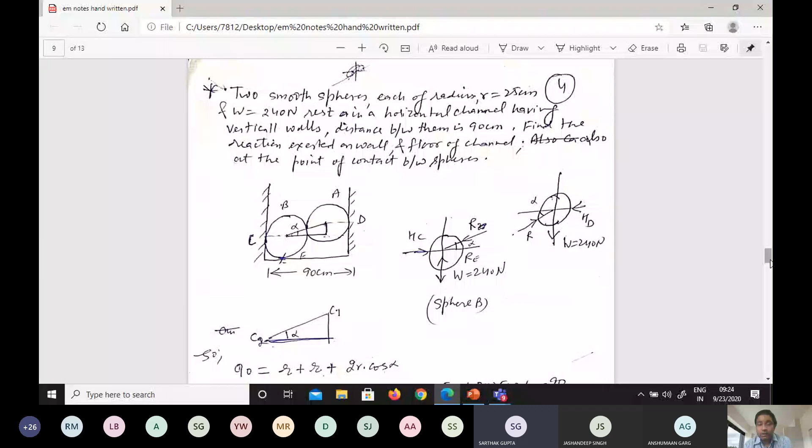My question to you all first is that I gave you one numerical problem on Friday. Were you able to solve this problem? Yes sir, we all did. Can I discuss the answers of this problem? Though I have only given you the question part, I am here explaining how you have to do it.

I assume all of you are very intelligent and good students, so I assume you all have solved the problem. But I still want to discuss it so that if one or two students are not able to get it, they can also understand. Meanwhile, I will also share the answers.

So this is the two smooth spheres here, and this is the rectangular wall here. You can see this is sphere B, which is in contact with this vertical, or rectangular trough, at point C and point E, and at point D. So we have made the FBD. You can see for sphere B, the FBD is like that, very simple.

When the vertical wall is there, this is the reaction here, RC. I think there is no issue in that.

Similarly, when you see for sphere B, it is lying on the floor, so there has to be two reactions: one weight of the sphere acting downward, and the reaction from the point E. So RE is the reaction acting upwards, and W is the weight acting downwards for sphere B.

And one reaction, what is this reaction? Because two spheres, sphere A and sphere B, are both in contact. I already told you earlier, reaction always acts when two bodies are in contact. So these two spheres are in contact, so two reactions will be there. Let us say it is R, and this angle here is alpha.

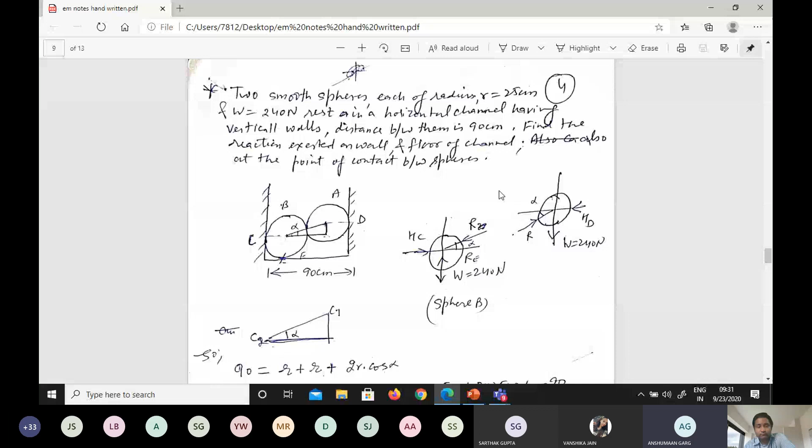Sir, can you please explain that triangle part again? Yeah, I'm again explaining it. See here.

Because we know we have to calculate the alpha here. This is the reaction R, which is between the two spheres. We have to calculate the alpha angle here. So how will we calculate it? Let us say this is point C1, this is point C2.

I have just made the diagram, the extension view or the enlarged view of this part. C1, C2, and angle is alpha. This portion is how much? It is R plus R, that is 2R.

Okay, and what is this portion? We have to calculate this portion according to our question. So this total is how much? 90. So 90 can be equal to, this is R and this is R. So R plus R is how much? 2R plus C. This is base.

We have to calculate this part only. This is R and this is R. We have mentioned here R plus R plus. What is this portion? Base upon hypotenuse. What is it? Base upon hypotenuse is cos alpha. What is hypotenuse? R plus R, that means 2R. That will be plus 2R cos alpha.

So this total 90 length can be written as R. This one is R, this one is also R, plus this distance is how much? Base upon hypotenuse. Hypotenuse is 2R cos alpha. So we have written here 90 is equal to 2R plus 2R cos alpha. And after that we have just calculated the value. We get the value of alpha here, 36.87 degrees.

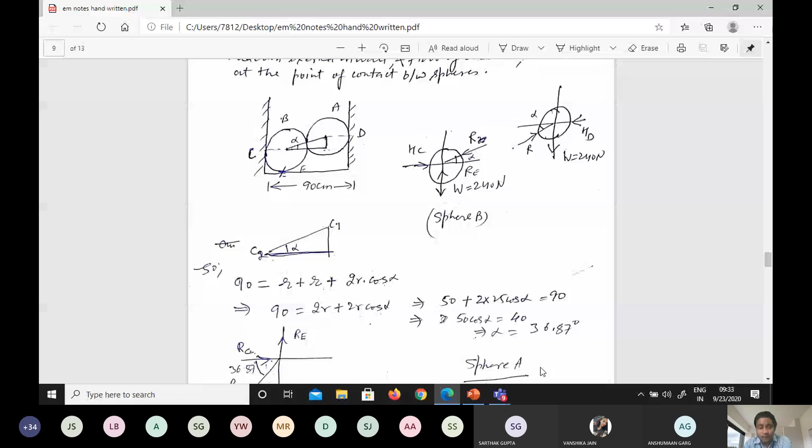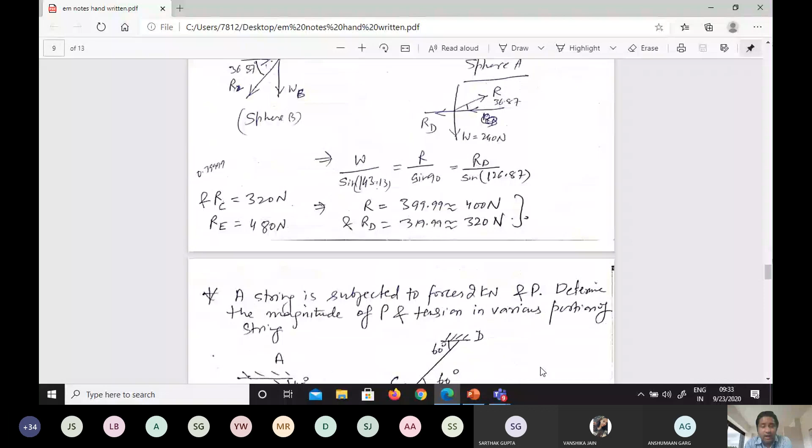So now is it clear to you? Yes sir, clear. So after calculating the alpha, we have just substituted the values, and we will get the values R, RD, RC and RE. This is the final solution for the numerical which I have given you in the previous class. So I hope that you are now able to solve the problems of sphere.

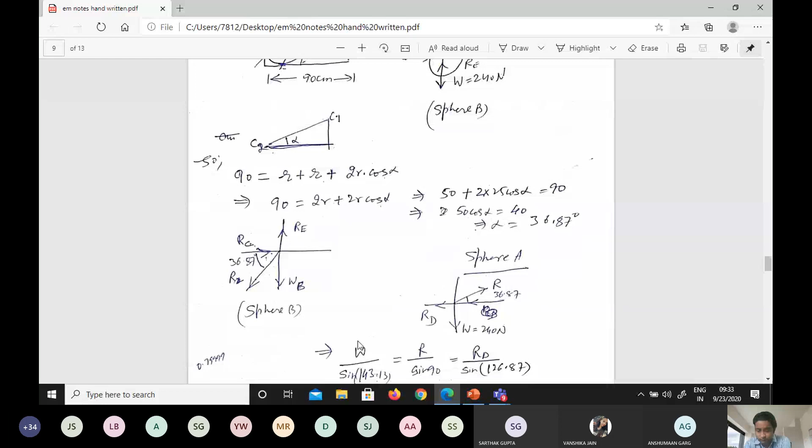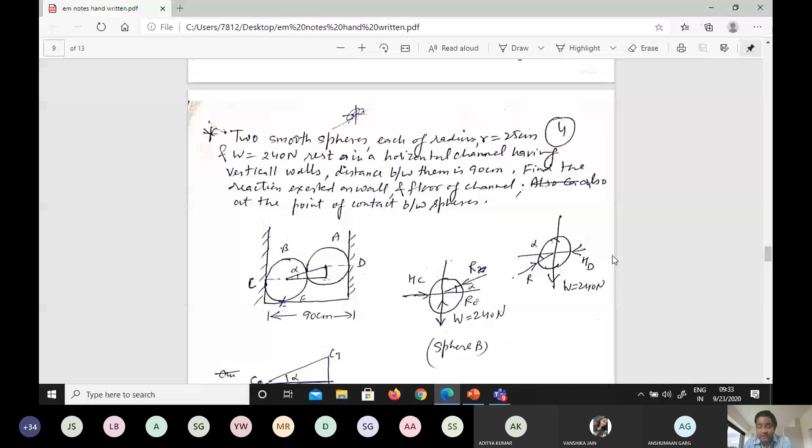Now coming to next problem. I am discussing very simple problems right now so that you can able to understand. Now coming to next problem here. Write down the problem: A string is subjected to a force of 2 kN and the force P, and determine the magnitude of the force P and the tension in the various portions of the string.

This is the wall here at point A. This is the wall here at point D, and we have hung one string from here, and we have hung another string from this at CD. At this CD string we have put one weight hanging here, and after that again we have put a string here BC, and these three strings AB, BC and CD are combined at point B, and from point B we have again hung a force of 2 kN, and the angles I mentioned to you.

So what you have to do: you have to determine the magnitude of the force P and the tension in the various portions of the string. So can you do this problem?

Yes, sir. Yeah, try to solve it, and if you're not able to understand, then tell me. I will discuss the solution with you. So try to solve it.

So see here, I am giving the hint. At point A and point D are fixed. So you can see at point C we have three forces here: tension TCD, tension TBC, and the force which is acting downward, that is force P. So at point C first of all, three forces will be there: TCD, TBC and force P which is acting downward.

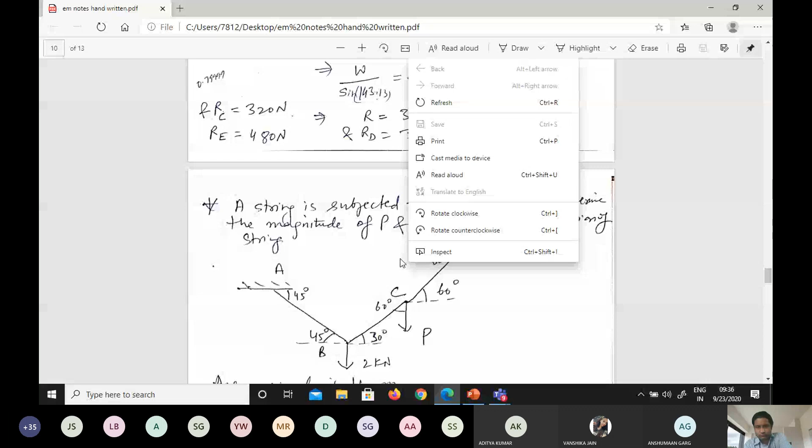I am not showing the complete solution here. I am waiting for you to solve it first of all. Okay. This is only the question for you, and try to solve it.

Solve the question and then tell me the answer what you are getting.

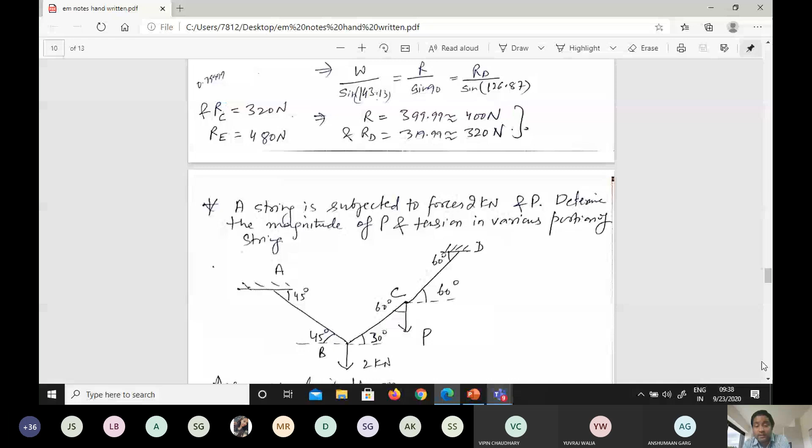Yes, sir, 1.46. Which one? TCD or P, sir. P. See, for P we are getting 1.46. Okay, fine. Yes, sir, 1.464.

Yes, sir, you can all see the solution here. Yes, sir, for the accuracy. Point B, okay, it's fine. For the point, sir.

B: TBC and TAB. TAB and TBC angles are very much clear to you. 45 degrees is clear here. 30 degree from here, 2 kilonewton downwards.

Okay, TAB and TBC, what are you getting? 1.793 and 1.464. Yeah, you can see it. I am showing the solution to all of you.

Yes, sir, if you have 1.793. 1.793 is TAB and TBC. Yes, sir, 1.464. Yes, sir, students, if you have any issue in making the FBD, you can see the solution here. For point B, we are making the FBD.

Simple, you can see here. For point B, when we take point B, angle is TAB: 45 degrees, clear here. TBC angle 30 degree. So it's very simple. We can make the FBD using Lami's theorem because we have three forces.

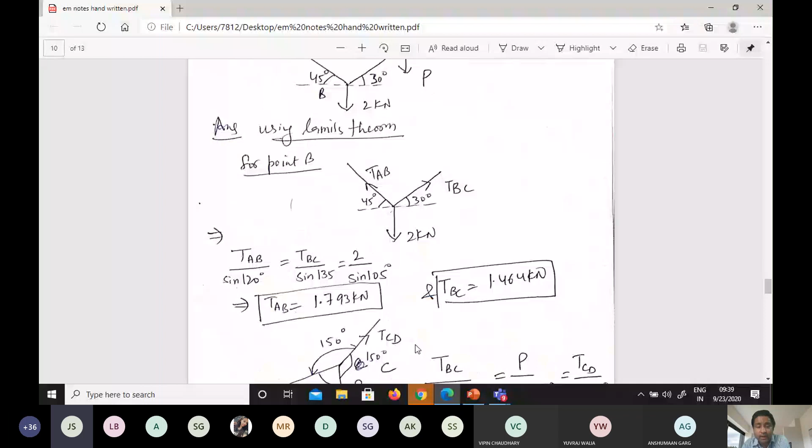Okay, now again, for the point, excuse me, C, yeah.

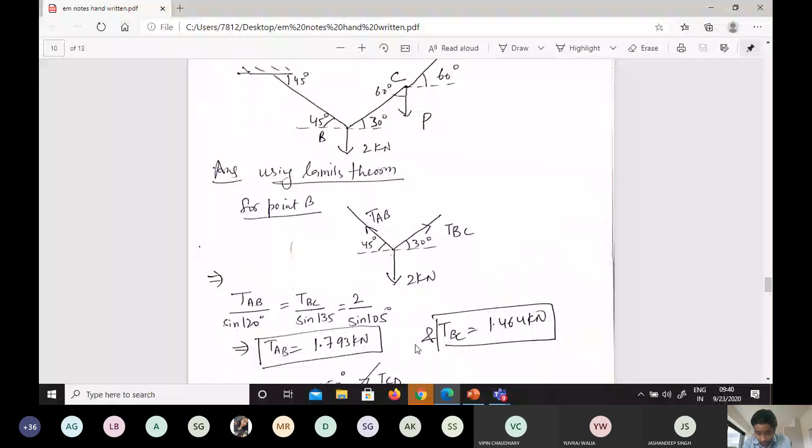TAB, TBC for the point B. Similarly here, for the point C, you can see what I have taken. At point B I have taken the direction outward in this direction, and I have taken again away from the point C.

So both will nullify, or you can say both will cancel. So I have taken in this direction and I have taken in this direction for TBC, so both will nullify or cancel out. So for point C, I make the FBD here like that: TCD, TBC, and the force P acting downward.

Angles are 150, 150, and 60 degrees. If you have any issue how to calculate the angle, let me know. Otherwise, this problem is solved from my end and also from your end.

P is 1.464, TCD, TBC, and TAB. These are the different values you should be getting. See the solution and cross check it.

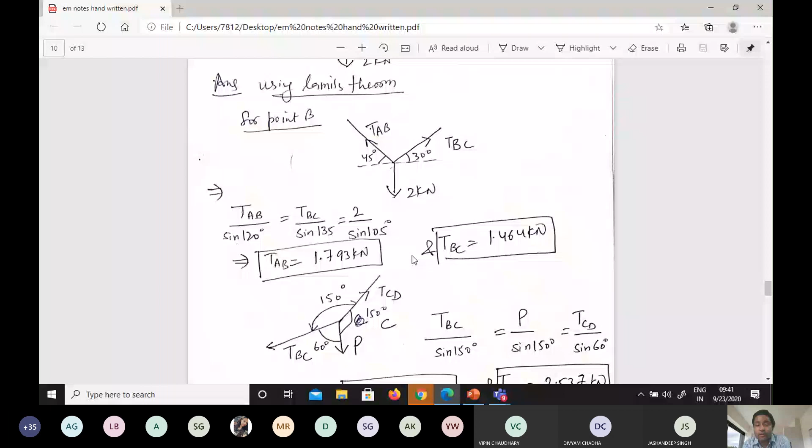So at point B and at point C, the value of TBC is the same, but the direction is different. Yeah, if we take the same direction, then how will you make the system in equilibrium?

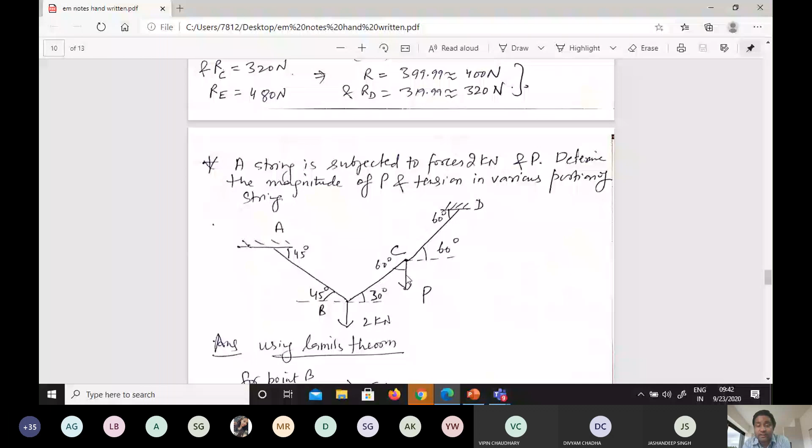See, when we are taking point B, direction should be outward. Similarly, when we are taking point C, direction should be outward. Otherwise, what will happen? The tension at TBC will not be neutralized. So I can tell you from here, we have to take it like that.

See this and this. So forces has to be like that. TBC has to be like that. Otherwise, what will happen? This part or this cannot be neutralized. So in combination, forces are always like that.

Now the TBC is coming in both the points. So at one point I will take it like that. In the other point I will take it like that. So the net effect is zero, or you can say the net effect is to consider that the system is in equilibrium.

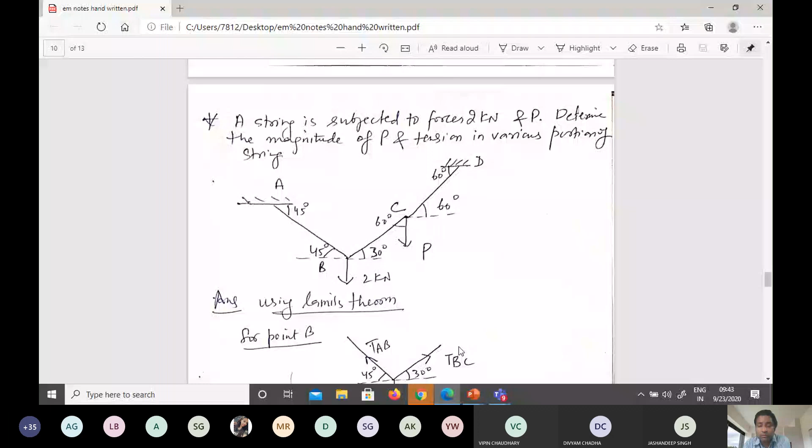That's why we have to take the directions like that. Yes, sir, so I think this problem is solved now for you. Average students, can you tell me this problem is solved? Can we proceed to next problem? Yes, sir, yeah.

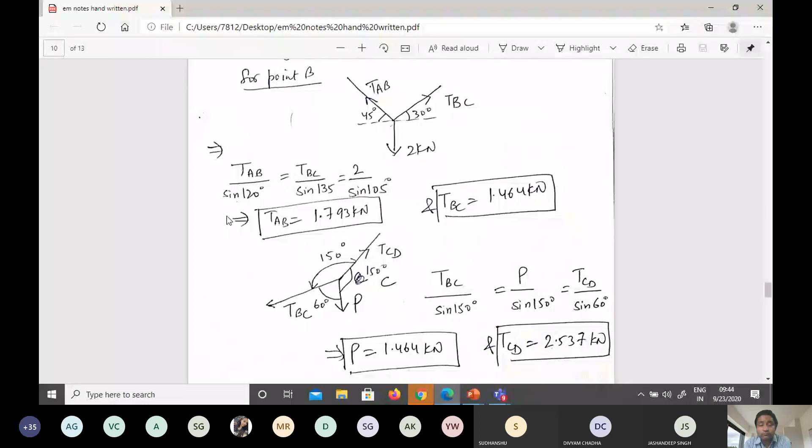So can you go back? Sir, please show the question again. Yeah, this is the question you can see. Sir, 16.55. Tension or reaction? Sir, tension. Okay, tension, sir, 16.55. Okay, yes, sir. Just calculate the reaction also. Sorry, not P, reaction. What you are getting?

Sir, how much was the T? T you have to calculate, and I will tell you the answer. Sir, 354.9 I am getting for the tension in the cable. Wait. Tension is 354.93. Okay, very good. And P is... Yes, 321. Wait, sir, I didn't calculate it.

Listen, for the first part, when you are solving it, tension is different. For the second part, tension is different. For the first part, tension is 11.033. Whatever you have calculated, this is for the second part. For the first part, tension is 11.03377 Newton, and the reaction here is 145.33. Just tell me what answers you are getting. You are getting the same answer for the first part only, not for the second part.

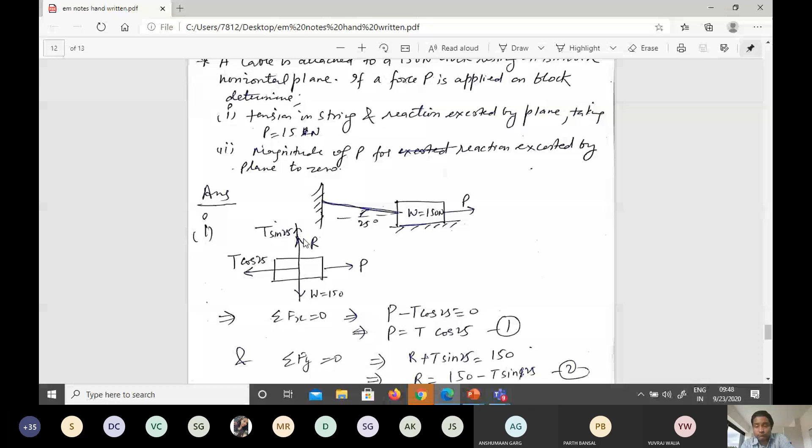Sir, we have to just combine the y, Fy is equal to 0 in the first part. Yes, you can see the solution also. See, this is the FBD we have made for the first part. Tension outward 25 degree, and resolving it into two components, T cos 25 and T sin 25. Okay, and the weight acting downward, reaction acting upward, and P is the force.

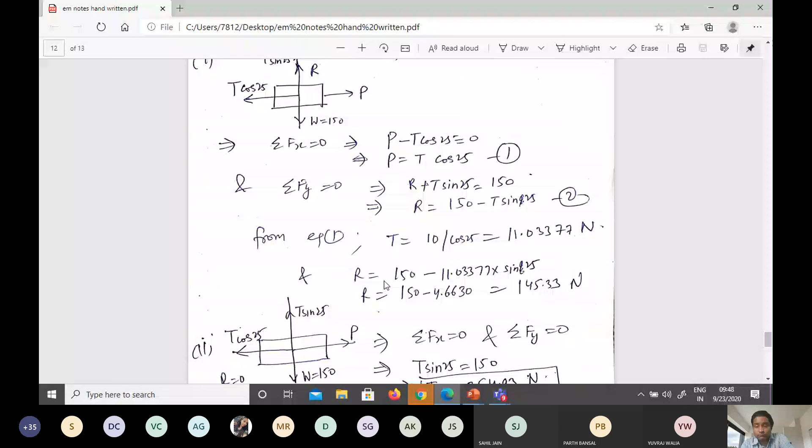Reaction 143.006 upward. 145.33. See the solution once again. This is the FBD.

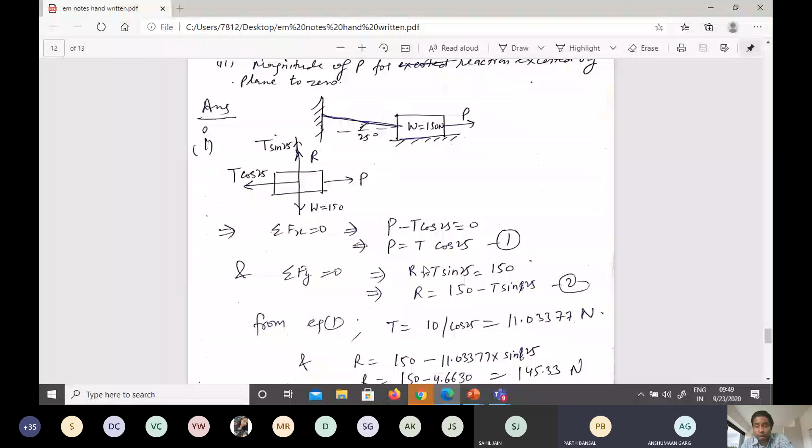Sir, yeah, P minus 16.55 is coming. Sir, we have to take P as 15? 16, sir, I am getting tension as 16.55. Yes, sir, we have to take, if we take P as 15, then tension is 16.55. In the question, they have taken P as 10. Yes, so in the answer. Okay, sorry, you can take it 10.

Yeah, it's 10. You can take it 10, and after taking 10, you get the value. Okay. It's 11.033. Yeah, you have to take the value of P as 10, not 15. Then you will get the same answer.

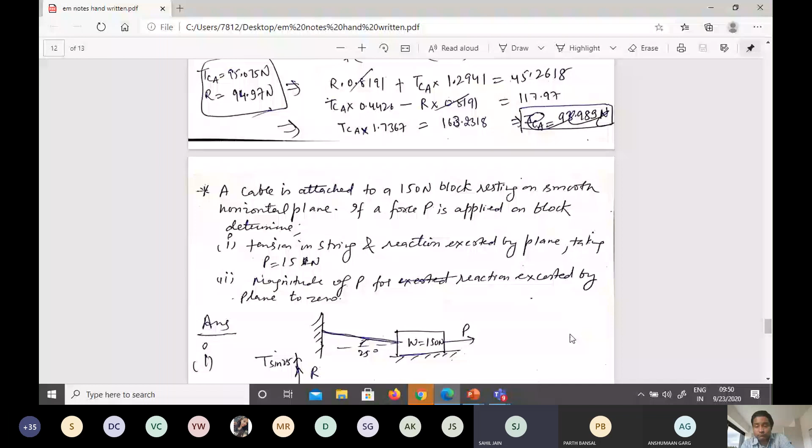Okay, sir. Okay, so what is the value of R you are getting? R should be 145.33. Calculate it and tell me the value. What you are getting? Yes, sir. 145.33, 145.4. It's okay, it's not an issue.

Sir, please explain the second part once. 145.33. You see for the second part. Second part says that you have to calculate the value of P for which the reaction exerted by the plane is zero. Means the reaction here, what we are showing as R, is 0. So you have to neglect this R in the second part. Okay, and rest of the FBD will remain the same. See the second part. Okay.

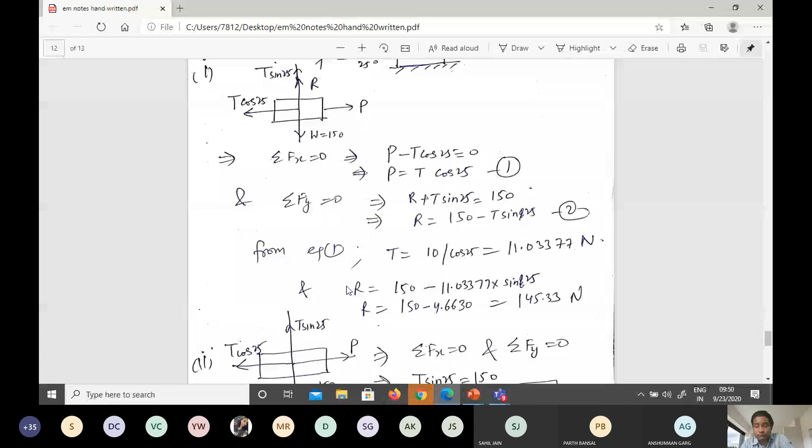According to the question, I am repeating: you have to calculate the magnitude of the force P for the reaction exerted by the plane to be zero.

This is the plane, or the surface, and because the block is acting on the plane, the weight of the block will be downward due to gravity, and according to Newton's third law, the reaction will be acting upward.

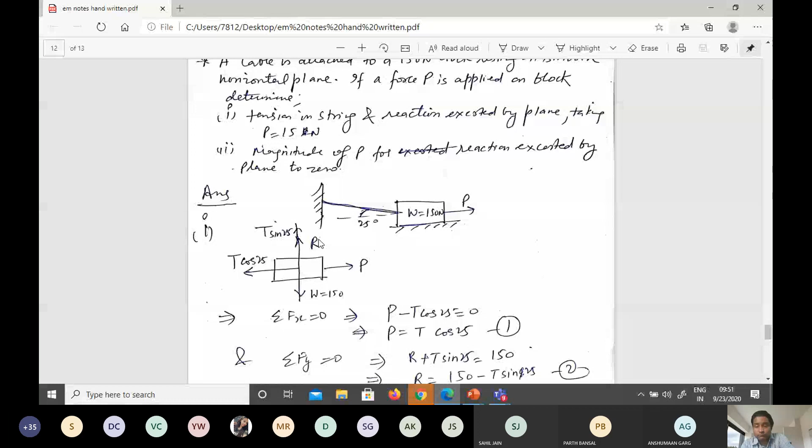Now according to the question, we assume that R, which is exerted by the floor on the block, is 0. So we substitute R as 0 and vanish it from here. The expression, or the FBD, will be the same here: T sin 25, T cos 25, R is 0, W downward, and P is towards the right hand side.

Now you can again apply summation Fx and summation Fy to get the values of P and T. P and T will both be different for both cases, because in the first case we assumed the reaction by the floor on the block is there, and in the second case the reaction by the floor on the block is 0. So in the second case we take R as 0, and the rest of the FBD remains the same, and then again we apply summation Fx, summation Fy.

After applying these two equations, we get the value of P as 321.65 Newton, and tension as 354.93. Calculate these two values and tell me if you are getting the same value or not.

Same value, sir, same values. It's fine now. So all of you are able to solve this problem.

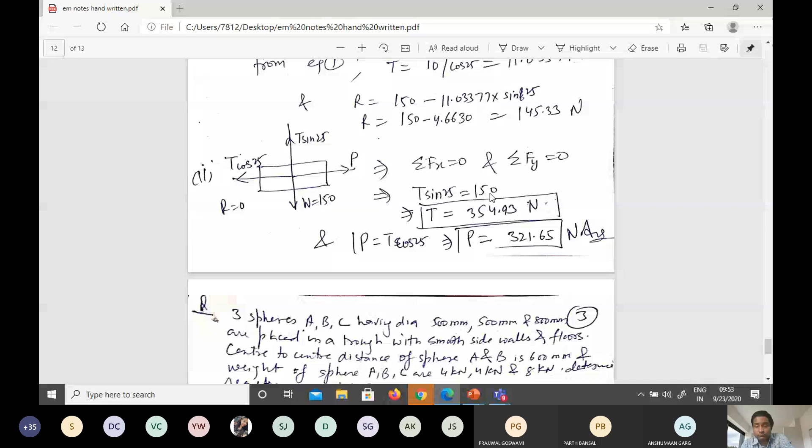Should we proceed to the next problem?

Students, yes, now we are discussing the last problem of the day, and after that probably these coplanar force system problems are over. Tomorrow I will be discussing some problems on moment and couple, and on Friday we will be starting with friction. So before starting with friction, I will give you one assignment.

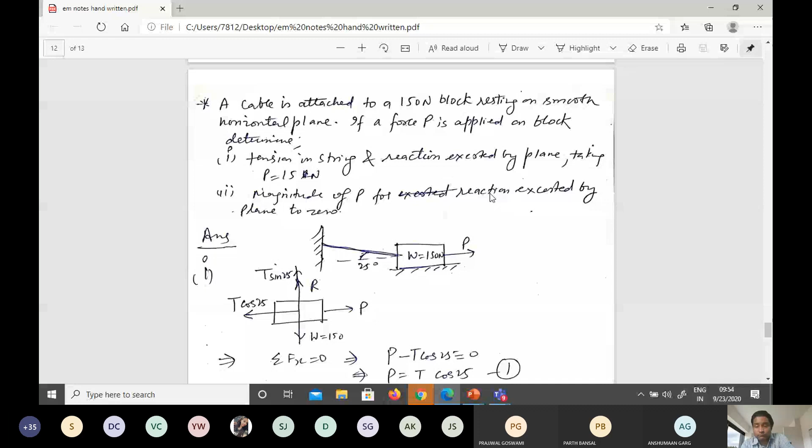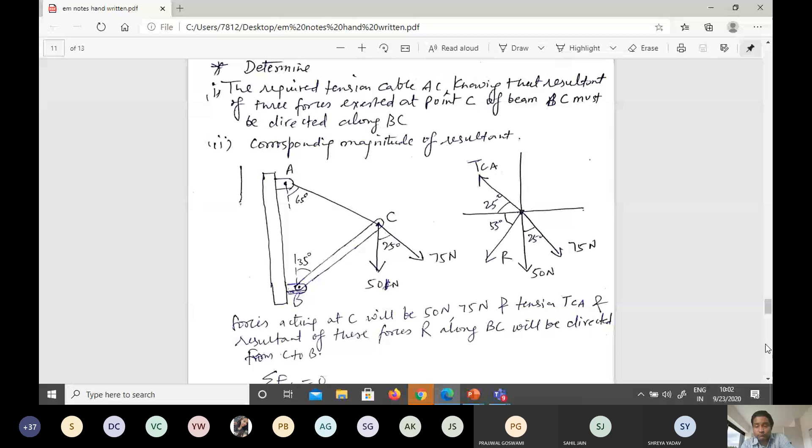TCA is 95.079 and R is 94.97. Check it once again, I think there's some calculation error. See the expressions for summation Fx, summation Fy.

So these are the final answers. TCA is 95.075 Newton. Student: Sir, shouldn't it be 75 cos 25 there in summation Fx?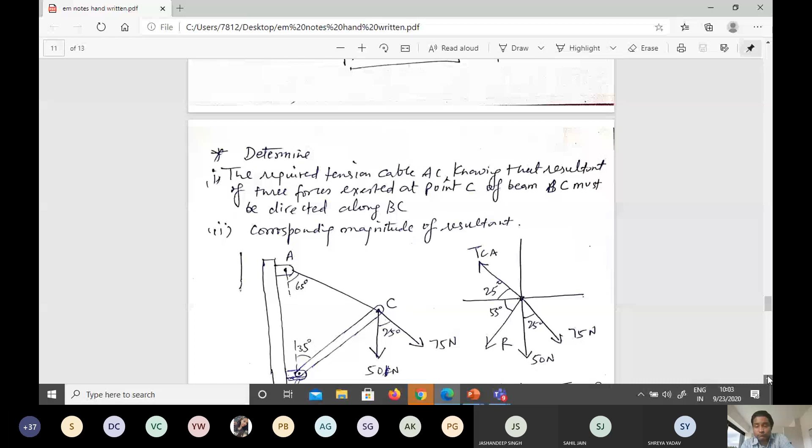Why? See, the angle is 25 degree here, so this will be cos and this will be sine. Are you getting it? Should I repeat? The 75 Newton force, the angle with the vertical is 25 degree. That means this portion will be 75 cos 25 and this will be 75 sin 25. So the horizontal force is 75 sin 25, not cos 25.

See the figure once again, then only you can understand. That is 75 sin 25, and then again TCA cos 25 and R cos 55. See the figure and again see the equation. I think now it is clear to you. The angle the 75 Newton force makes with the vertical is 25 degree, and we know it very well.

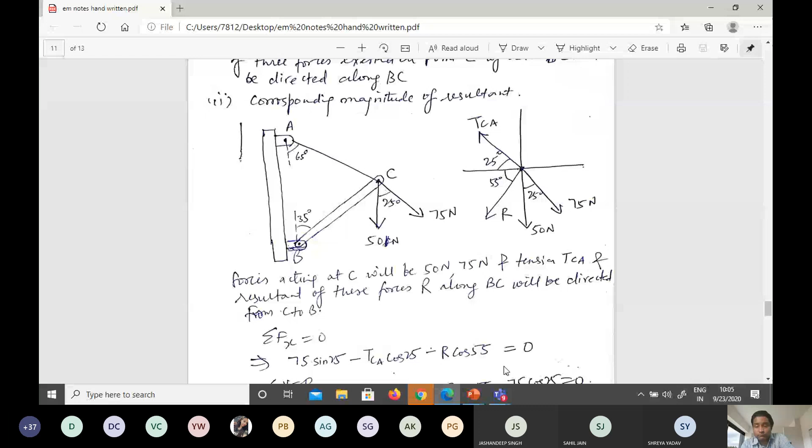If a force is inclined at angle theta to a certain axis, then the component along the axis is cos theta, and the component perpendicular to that axis is sin theta. So this will be 75 cos 25 and this will be 75 sin 25. That's why it is 75 sin 25 here, not cos. So you have to be alert with your mind about what you are solving. So it's 75 sin 25, TCA cos 25, and R cos 55 for summation Fx, and similarly for summation Fy.

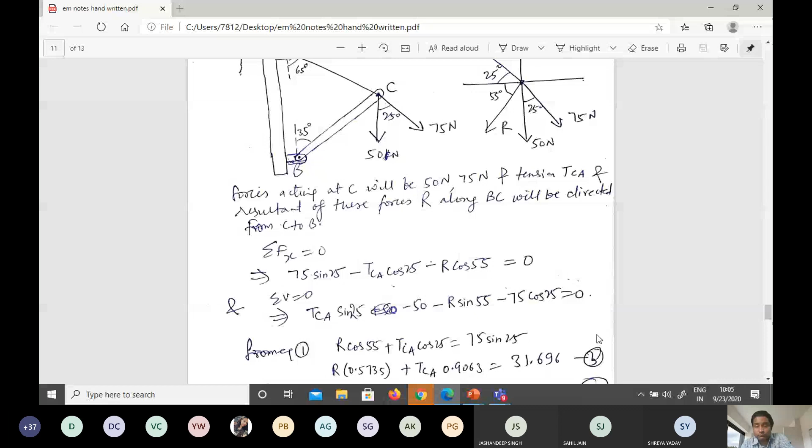So after calculating, you will get the value here. TCA is 95.075 and R is 94.97. Please write down the answer in your register. These are the two values you are getting, TCA and R. When you solve the answer, you should get these two values: TCA is 95.0759 and R is 94.97 Newton. This is the value.